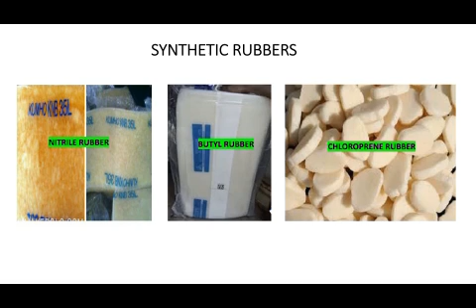Chloroprene rubber is known for its adhesion property, and it's also having very good oxidation and ozone resistance. Its tensile strength is also good, but its solvent resistance is poor. EPDM rubber is known for its very good weather resistance, ozone resistance, and oxidation resistance. It's also good for radiation resistance. But its negative is very poor tensile strength.

Fluorocarbon rubber is also well known for its oxidation and ozone resistance, and it is having very good degradation resistance and heat resistance. Acid resistance and solvent resistance may be poor.

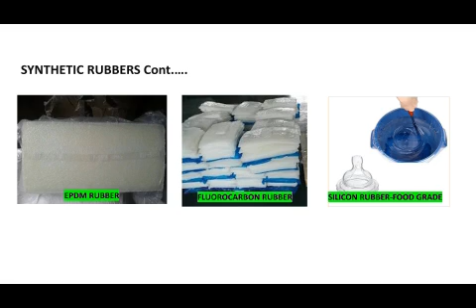Silicone rubber is synthetic rubber. It has very good heat resistance, and it can be used for food grade products. Silicone rubber can be used in rockets and other areas where high temperature is a matter. Silicone rubber is available in two forms: liquid or gel form, and it's also available in solid form.

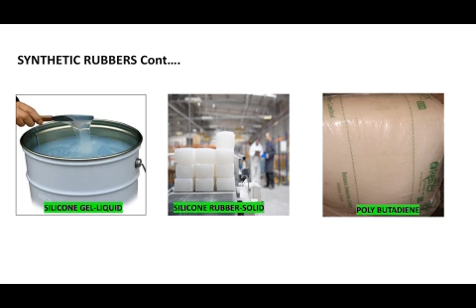Polybutadiene rubber is a synthetic rubber. It is known for its skid resistance. It's used in tire making along with other synthetic rubber and natural rubber. Polyurethane rubber is available in liquid form. Polyurethane has very good tensile strength, and its ozone resistance is also good, but its acid resistance and alkali

resistance are poor. Styrene butadiene rubber is similar to natural rubber. It has good tensile strength, and its wear and tear property is also good. It has very good hardness. These are some good properties of styrene butadiene rubber, but it is poor in ozone resistance, acid resistance, alkali, and

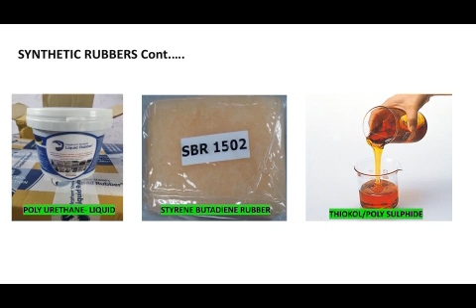solvent resistance. Thiokol polysulfide is a synthetic rubber which has very good acid resistance. Polysulfide has poor compression set and resilience properties.

Now, let us discuss natural rubber production statistics in the year 2022. In India, the production was 8,43,000 tons in 2022. Natural rubber production in Kerala in the year 2022 was 6,32,250 tons. It comes around 75% of the total natural rubber produced in the country.

World ranking. In natural rubber production, Thailand comes first. NR production in Thailand was 47 lakh 53,000 ton in the year 2022. Indonesia produced around 31 lakh 35,000 ton. Vietnam produced 12 lakh 92,000 ton. Ivory Coast produced 12 lakh 86,000 ton. China 8 lakh 53,000 ton.

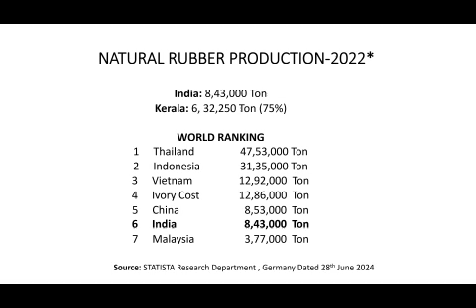India produced 8 lakh 43,000 ton in the year 2022, and India came sixth. Malaysia is in seventh position, and they produced 3,77,000 ton in the year 2022. That's about the natural rubber production in the year 2022.

Now, natural rubber consumption. India consumed around 12.57 lakh ton per annum, whereas China consumed 57 lakh ton per annum. Natural rubber consumption of China is very high, and it comes around 40% of the total natural rubber produced in the world. Now, rubber consumption product-wise in India.

In the country, a greater portion of natural rubber is consumed for tire production. It comes around 65%. In footwear, natural rubber consumption is 12%. In belts and hoses, NR consumption is 6%. In camelback and latex products, natural rubber consumption is 7%. And in other products, NR consumption is 10%. So this is the overall picture of natural rubber consumption in India.

Whereas in Kerala, in the non-tire sector, we consume only 4% natural rubber, whereas in the tire sector, 12% natural rubber is consumed. That's the picture of natural rubber consumption in various rubber products.

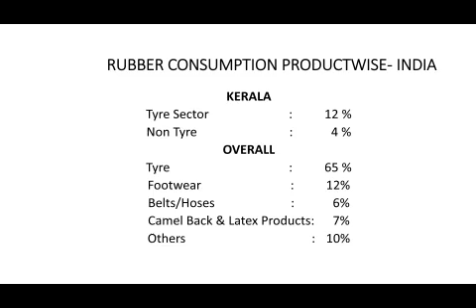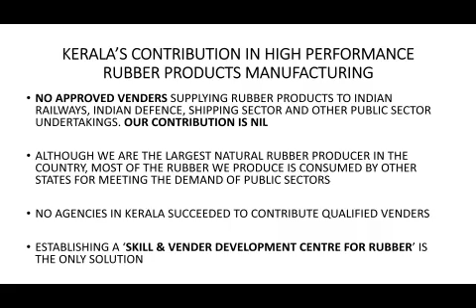Kerala's contribution in high-performance rubber products manufacturing. No approved vendors supplying rubber products to Indian Railways, Indian Defence, shipping sector and other public sector undertakings. Our contribution is nil. Although we are the largest natural rubber producer in the country, most of the rubber we produce is consumed by other states for meeting the demand of public sectors. No agencies in Kerala succeeded to contribute qualified vendors. Establishing a skill and vendor development center for rubber is the only solution.

Need and scope of skill and vendor development centers for rubber. Qualified individuals in the production of high performance rubber products are inevitable. The professionals have to stay updated with the complexity of rubber products and also with the latest advancements in industry. The center will offer a wide range of training modules covering rubber product manufacturing, processing, and quality control.

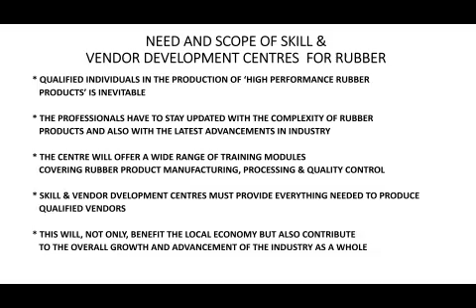Skill and vendor development centers must provide everything needed to produce qualified vendors. This will not only benefit the local economy but also contribute to the overall growth and advancement of the industry as a whole. Pending proposal for skill development center in rubber. Projected employment creation, latex and dry rubber. Direct employment expected is 600. Indirect employment expected is 1,500. Total 2,100 per annum. This proposal is yet to be considered by governments.

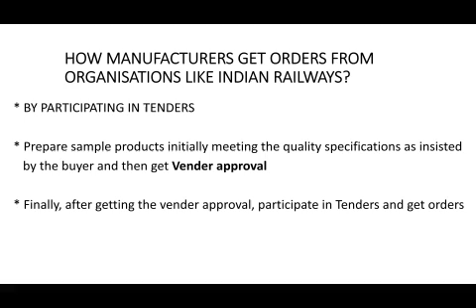How manufacturers get orders from organizations like Indian Railways. By participating in tenders: prepare sample products initially, meeting the quality specifications as insisted by the buyer, and then get vendor approval. Finally, after getting vendor approval, participate in tenders and get orders. Some high-performance rubber products demanding stringent quality parameters. Railways. The picture shows some of the rubber products used in railways.

Rail pad made of butyl rubber, 6 mm thickness. Rail pad again made of natural rubber, 6 mm thickness. Rubber vestibule. Rubber vestibule is a big rubber component used in rail coaches.

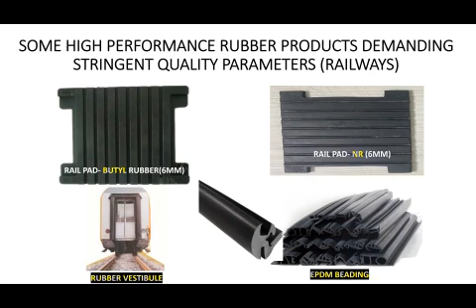EPDM beading. EPDM beading is used for fixing big glasses in rail coaches, especially in the air-conditioned compartments. EPDM is well known for its weather resistance, ozone resistance, and oxidation resistance. It's also good for radiation resistance. Ethylene propylene diene monomer rubber is known as EPDM.

Sample tender of Indian Railways. Before a rubber product manufacturer participates in the final tender, the manufacturer has to go through a sample tender published by Indian Railways. First of all, the manufacturer has to submit a request for proposal. With this proposal, the manufacturer has to prepare samples of products as per the specifications insisted by Research Designs and

Standards Organization (RDSO). In this sample tender of Indian Railways, a global notice was issued by the Lucknow office. Sample tender of Indian Railways, Government of India, Ministry of Railways, Research Designs and Standards Organization (RDSO), Lucknow. They issued a global notice for a request for proposal. As per this request for proposal, every manufacturer has to submit a proposal with a sample prepared as per the specifications insisted in this sample tender.

Ministry of Railways, Research Designs and Standards Organization Lucknow is inviting proposals from the firms whose product, high performance rail pad using rubber based pads, qualifies the technical criteria given in Annexure C for shortlisting the products for consideration for field trial on Indian Railways.

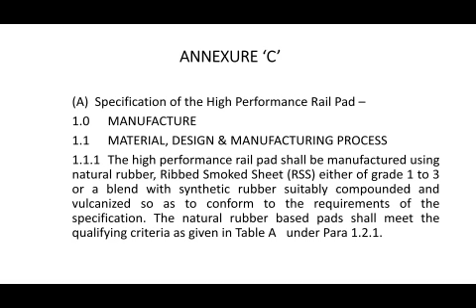Annexure C. In this annexure, manufacturing procedures and materials, designs, manufacturing process, etc. are explained. The high performance rail pad shall be manufactured using natural rubber, a ribbed smoked sheet either of grade 1 to 3 or a blend with a synthetic rubber suitably compounded and vulcanized so as to conform to the requirements of the specification. The natural rubber based pads shall meet the qualifying criteria as given in Table A under para 1.2.1.

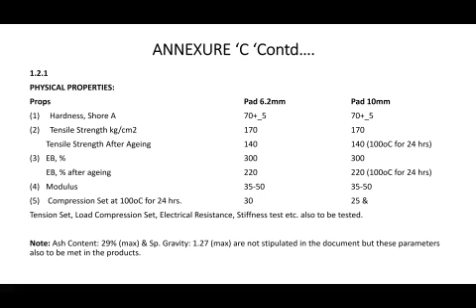These are the different physical properties to be met by each product. Especially here, it is a rubber-based rail pad. The parameters are hardness Shore, tensile strength before and after aging, elongation at break before and after aging, modulus, compression set, tension set, load compression set, electrical resistance, stiffness, ash content test, specific gravity test, etc. are to be passed in these rail pad samples.

Indian Railways, latest tenders 2024, some information. This year so far, there are 191 rail pad tenders in India published by various tendering authorities. Tenders taken for discussion. Rail pad. First example, tender notice number 1, that is TDR 4395327. In this tender, the tendering authority has given the briefing: tender for running contract for manufacture and supply of different kinds of CGRSP, composite grooved rubber sole plates. So this is the material the manufacturer has to supply.

Bidding type open tender, state West Bengal, city Kolkata. Last date for bid was 12/7/2024, and the earnest money deposit was 20 lakhs. Tender value was around 37 crores INR.

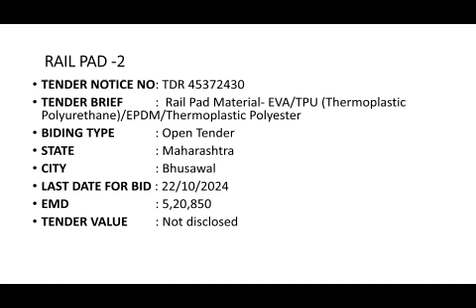Rail pad 2, tender notice number TDR 45372430. Tender brief: rail pad has to be made of material like EVA, ethylene vinyl acetate, or TPU, thermoplastic polyurethane, or ethylene propylene monomer rubber EPDM, or thermoplastic polyester. Bidding type open tender, state Maharashtra, city Bhusawal. Last date for the bid is 22/10/2024, EMD 5,20,850. Tender value not disclosed.

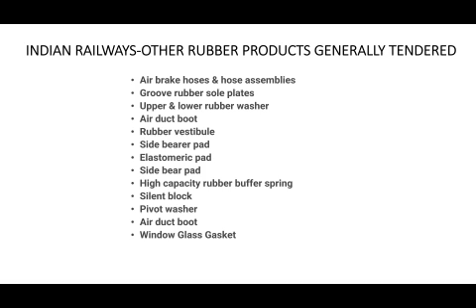Indian Railways other rubber products generally tendered. This is only a list for understanding. I am not discussing in detail all these rubber products here. Just to go through these various rubber products, railways also invite tenders for these rubber components: air brake hoses, hose assemblies, grooved rubber sole plates, upper and lower rubber washer, air duct boot, rubber vestibule, etc. We will discuss the areas to be focused on for manufacturing high performance rubber products in part 2.

In conclusion, Kerala's rubber sector stands at a crossroads. By establishing skill and vendor development centers, we can unlock tender opportunities in public sectors, create jobs, and fuel local economic growth. The time to act is now.

Let us collectively work towards enhancing skills for high-performance rubber product manufacturing, developing vendors to meet public sector demands, harnessing tender opportunities in railways, defense, shipping, and other sectors, fostering job creation and local economic growth. Together, we can propel Kerala's rubber sector to new heights, solidifying its position as a leader in the industry.